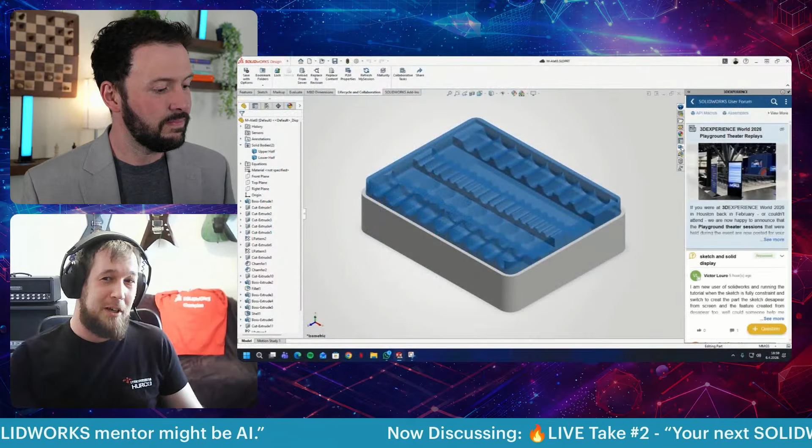But regarding this, I don't know if many people know, but you can access this inside SolidWorks. There's Ask Aura. So you can basically search without leaving SolidWorks. Let's say we want to know how to add custom properties. We write the prompt: how can I add custom properties to part, assembly, drawing, and also include configuration specific. So let's see what we will get.

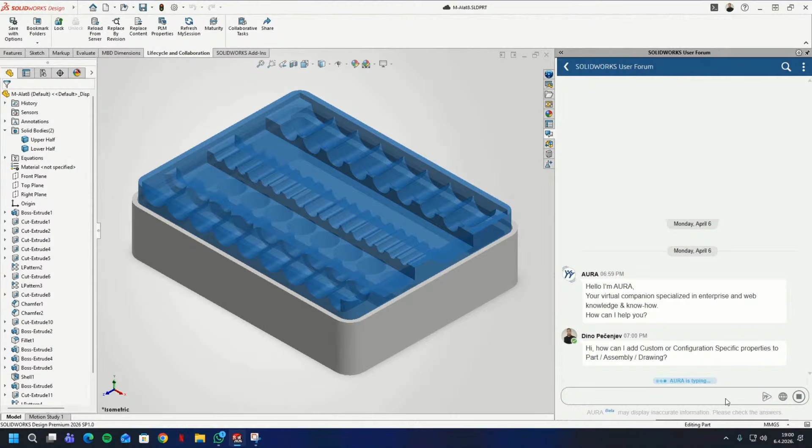With this, I mean, there are also solid practices regarding this. There's a lot on forums. You can find answers basically anywhere, but you can also get filtered-out information. What can you do? I mean, you can really deep dive into this.

It's not basically everything, but yeah, even with automatization with the APIs, here is the key consideration. And again, the sources, there are a lot of sources here. Some of these will also include the SOLIDWORKS best practices. And also, if I want to demystify the 3DEXPERIENCE easily, you can also ask Aura and you will get the answer. It's not like all that information is mystically hidden. It's right in front of you.

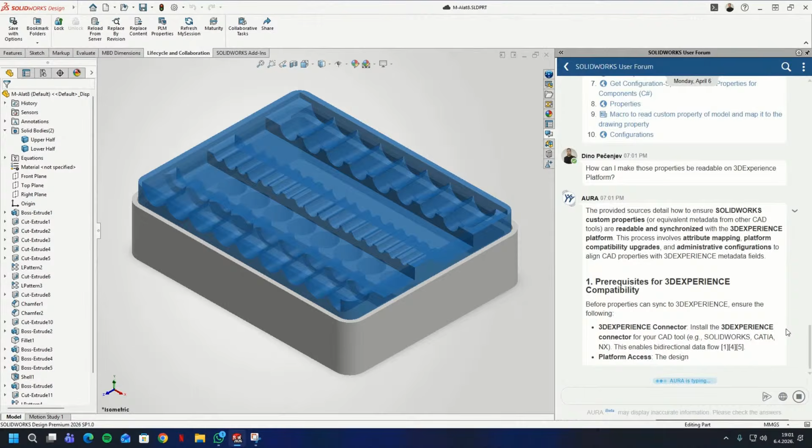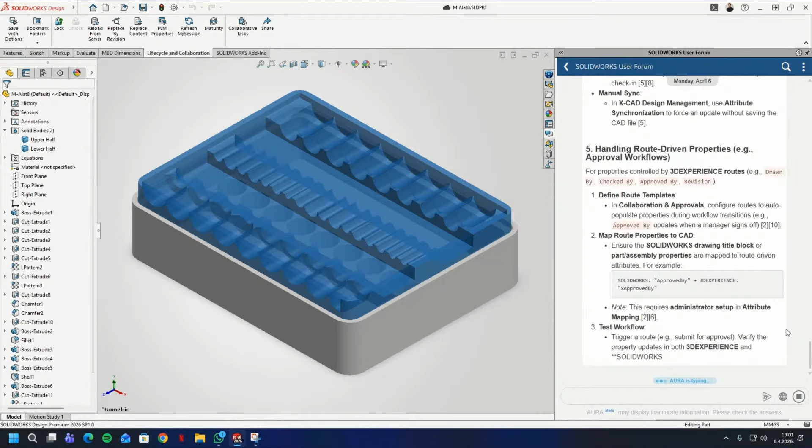So regarding AI, for me, it's getting the sources of information I can use. So I'm not focusing here on the AI Labs and Leo as a co-pilot, but rather just getting the information we need. That's my take, because if we use other LLMs, large language models like ChatGPT and, let's say, Claude. Okay, Claude will help you do the coding if you're not into programming like me. ChatGPT is just general, but these are sources of information tied directly to SolidWorks.

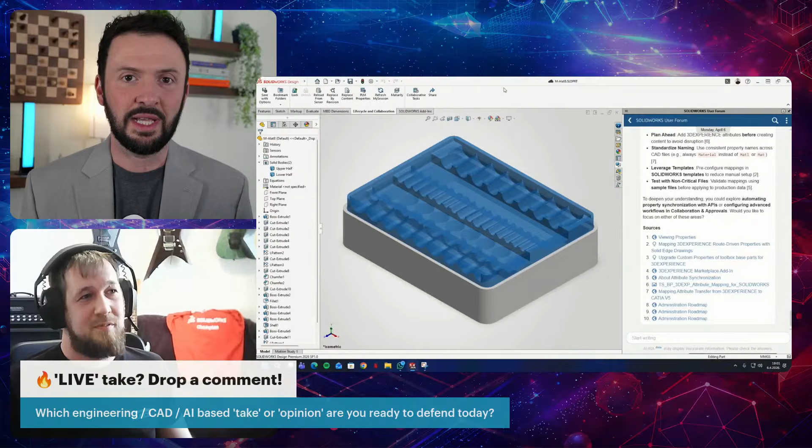That's the key stuff. So I don't know how many people know that even with the forum you can use the AI that's already built in there. And this was added back in... I always look, whenever I see somebody using SolidWorks Design like you are, in the bottom left corner to see which version they're using, because you can see it in the status bar, right? It says SolidWorks Design Premium 2026 SP 1.0 or FD 1.0. So you might be thinking, if this is new, maybe I haven't heard about it. It's brand new. I have to be using 2026 FD1.

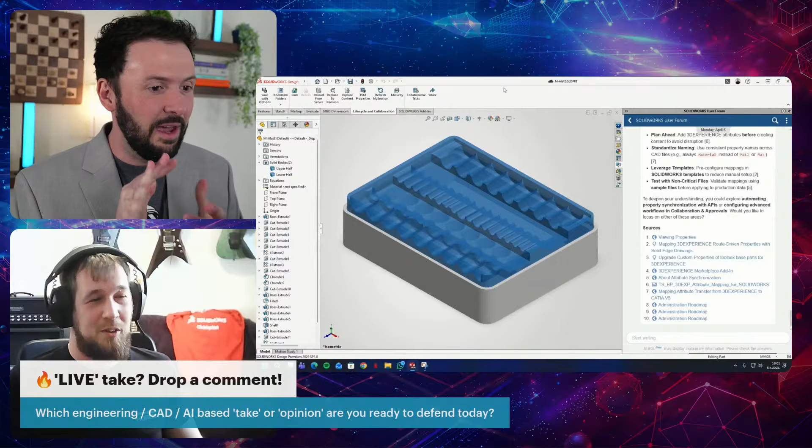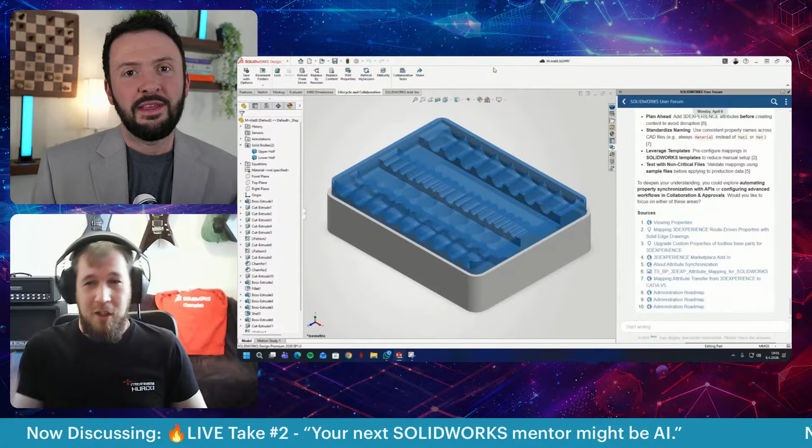No, not necessarily, right? This was included around 2025. We started adding it right in the interface. Yep, exactly. And soon after, not much time passed, and Aura also became available on the forum. So yeah, it's free. You just need a free 3DEXPERIENCE ID. If you already have access to the forum, you have access to Aura, even inside SolidWorks. So yeah, it's already here. So here, if you're on the task pane on the right side, beneath the forum, the last icon is AI Labs that you were exploring in the last episode.

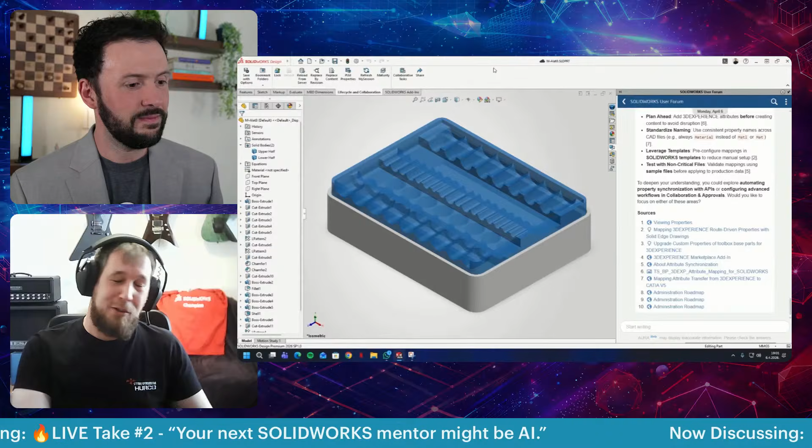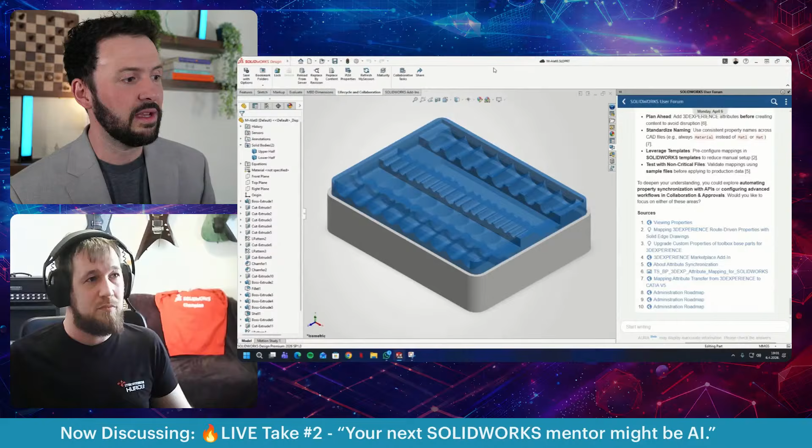So yeah, with AI, you can get a lot of information without needing to manually Google how to do this. Even if there's a question on the forum, it will get filtered down, if someone asked already. So that's a pretty nice thing as well. So why would you use this, just to press against this take? Why would you use this versus Google search or just going to the forums or something like that? Why is my next SolidWorks mentor AI?

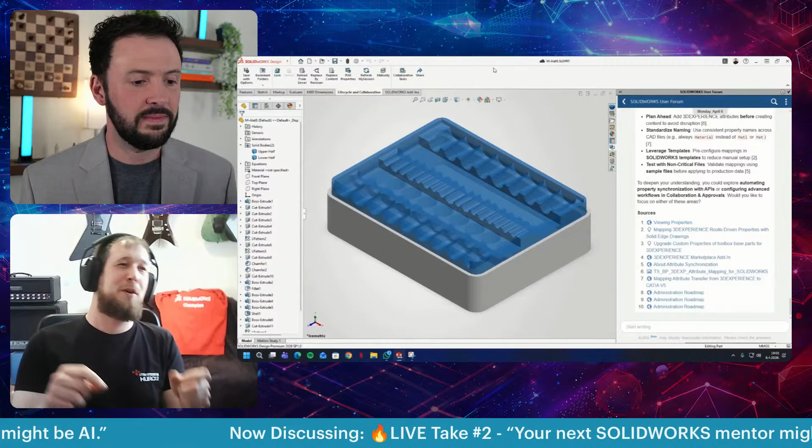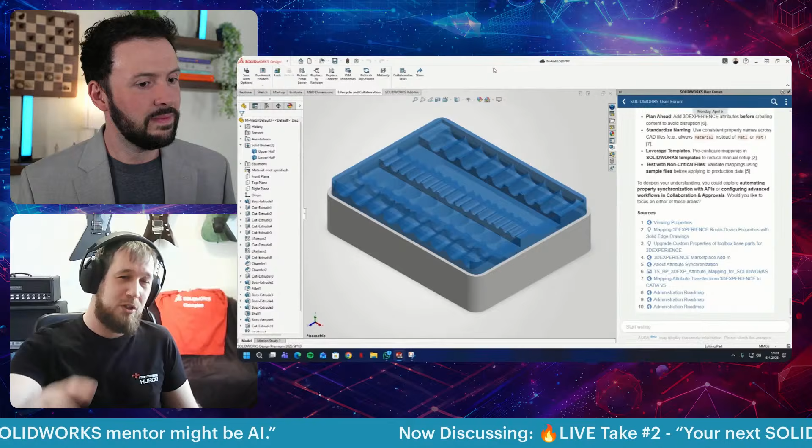So let's say you Google something, then you have to put SolidWorks help plus the specific topic, and then you get some version, then you have to filter out the other versions. Since there were changes between versions, you have to filter down again, searching and scrolling. And this is just straight and direct. And what I like here is that when you work inside SolidWorks, this is right next to you. You can do your design, ask it, the prompt will go, and while it finishes, you can check the answer.

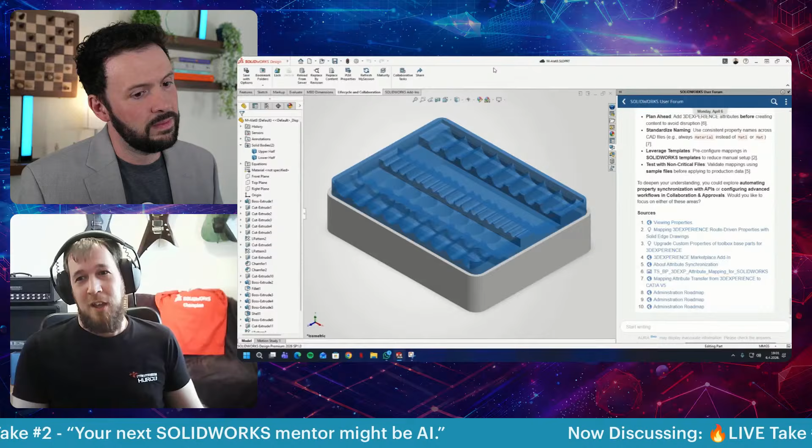So that's one thing. And if you go to the SolidWorks help website, which is tremendous, it's really huge, and you don't know what you're looking for, you'll get lost at some point. So here you can basically get shortcuts to there. So that's my point, because it's already integrated with SolidWorks. Not just with 3DEXPERIENCE SolidWorks, but with the desktop one as well. It's here and it's available to everyone.

I think, in support of what you're saying, you're also making a sort of tab of things you're interested in learning about. You know, if you Google something, you can add it to favorites, you can bookmark things, right? With websites, we can just add them to a tab, or add it to a note, however we're note taking, to make sure we can revisit things. But in this sense, we do have a conversational history.

And like a lot of other LLMs, for example ChatGPT or Claude or others, we have a conversational history. However, let's say you're like, okay, I might buy this take, I might think that my next SolidWorks mentor might be AI. That might already be true for me.

Maybe I'm in the minority right now. I'm asking my AI system a lot of SolidWorks questions. Well, what else are you asking your AI system? Because if you look at my license, for example, of ChatGPT, I'm asking it so many different types of questions. I'm asking it about growing grass. I'm asking it about psychology topics. I'm asking it about different ways to do things in this software, that software, in SolidWorks, etc.

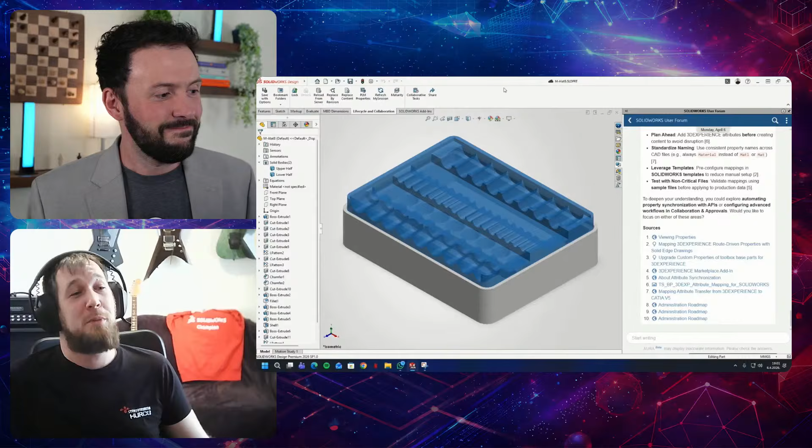Yeah, that's basically it. You have everything filtered out, and you don't wonder where this information is coming from. So I'm just wondering, how are people using Aura on the forum, or do they even know it exists on the forum? I'm curious about that, honestly. Or did someone think about using the AI on the forum through SolidWorks even? I'm curious about it.

Yeah, it's a great question. Let us know in the comments of the video, or if you're watching it live in the chat, best opportunity, right? Did you know that you could access Aura, an LLM, from inside of SolidWorks with many versions of 2025 and then 2026 as well? Have you tried it? What have been your results?

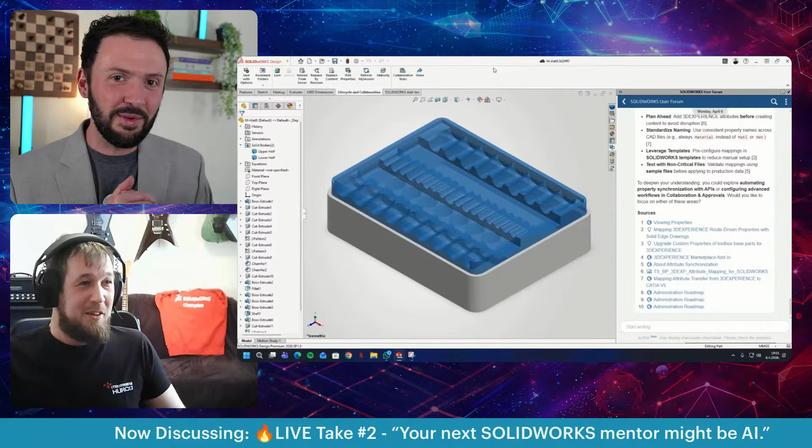First, I'm curious to see where am I getting this knowledge, and we're not using it. Interesting. All right, here's where the knowledge base comes in, of course. Okay, you did mention that. So it's access to knowledge and dedicated content for SolidWorks product users. Here you can find how to do something, how to troubleshoot an issue, know-how, basic questions and answers, maybe methodology,

basically any use case. For this, I used my free account to check what's available, and it's a lot of information. Let's say I picked the topic of templates because it's always a big topic. When you're upgrading SolidWorks, there was a good improvement, I think it came out in 2025, where if the file locations stayed default, it will just change the version up, so it leaves you less work to do.

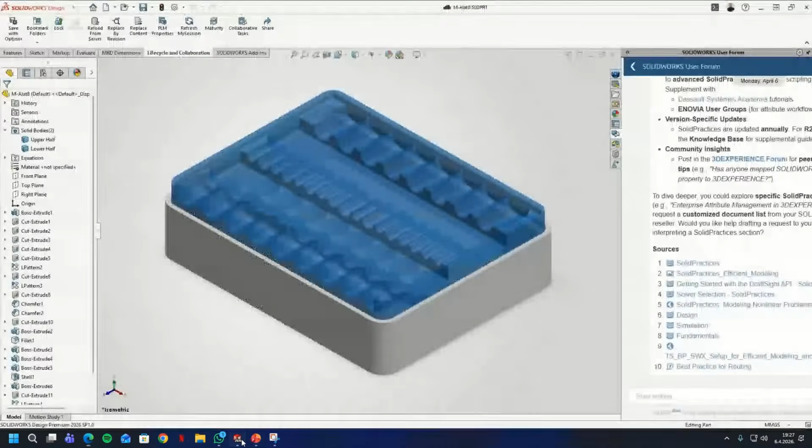So yeah, if I search for something like how can I determine if my template is an old version that I'm using, I get an answer. So this is the answer. I need to right click basically any plane that's predefined in the template, go to SolidWorks, right click it, go to properties, and here I got information on how old is my template. Simple like that. So if you ask for knowledge, you have it. It's here. It's not like it's completely hidden, you know.

Also, for some support cases, I use it - for example, there's a hotfix. For Windows, there was an issue where a Windows update caused a problem with the Windows address bar in PDM, and it was tied to Windows 11. And here you can also find the hotfixes. So besides asking everywhere, like why this doesn't work, where is this located, I can find it in the knowledge base. And this again is with free access, so this is available to everyone, and it says how to install the hotfix. You can download the hotfix, so it's for everyone.

So what am I missing if I don't use the knowledge base? If I ask myself that question, probably I'm going to spend a lot of time getting the same answer. So yeah, everything is here and it's already available to us. But yeah, sadly, not many people use it from what I saw.